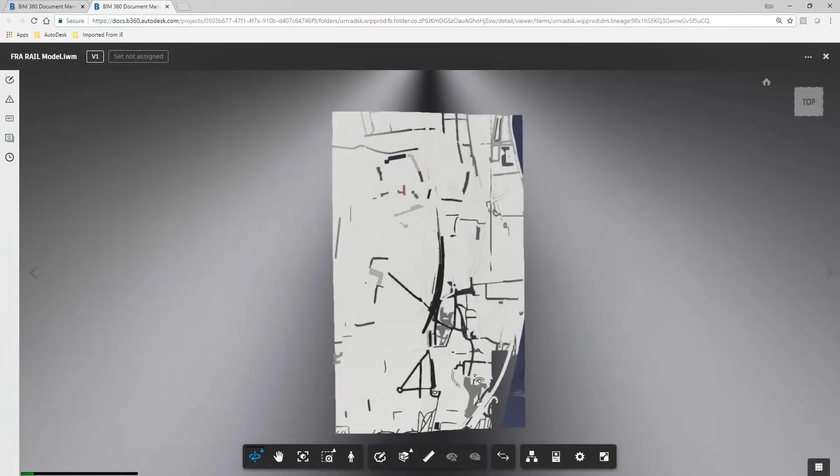Additionally, to being able to open and run the basic maintenance and operations of these different models, it's also possible to create duplicate models, and those will be stored locally. This is just a brief sampling of where this information can be stored, and you can create a local copy. This is going to be ideal for anybody who doesn't have internet access or knows they've got to work on a model they're not going to have access to. So that stores a local copy, and it can be brought back in as needed.

It's also possible that if a model has been removed from BIM 360, it can be managed separately just by disconnecting that model as well. Again, this is just to improve some of the functionality, whereas before this wasn't quite as clear. But on these opening menus here, right on the home screen, there's some pretty keen functionality that works with the maintenance of any of your models.

And then, of course, there's the ability to remove a cached model. If a model is still stored on BIM 360 and you need to remove that - if you've got some erroneous information, whatever it may be - it will remove that cache from your local drive, but it will still maintain that same model on BIM 360, so if you need to get back into it, you can do that as well. And of course, you have the ability to delete local copies completely from your machine as well.

So as we move on, there's some different functionality that's also been made available, and that's more with the shared views option. Typically, there would be one view available, but within your model itself, you could move around and actually define and create a shared view that is presented for BIM 360 or something like that. If you're sharing a model or collaborating in the work environment, you can actually select what that preview will be.

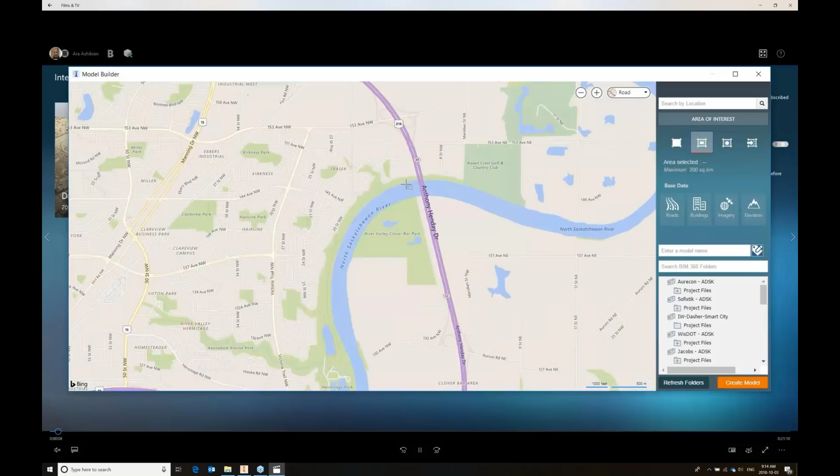Here I'm drawing an area where I want to create the model, and in a few minutes it creates a model. I superimposed a picture of the actual bridges that were built - twin bridges over the river. The bridge on the left has a suspended walkway for pedestrians; otherwise the bridges are relatively similar.

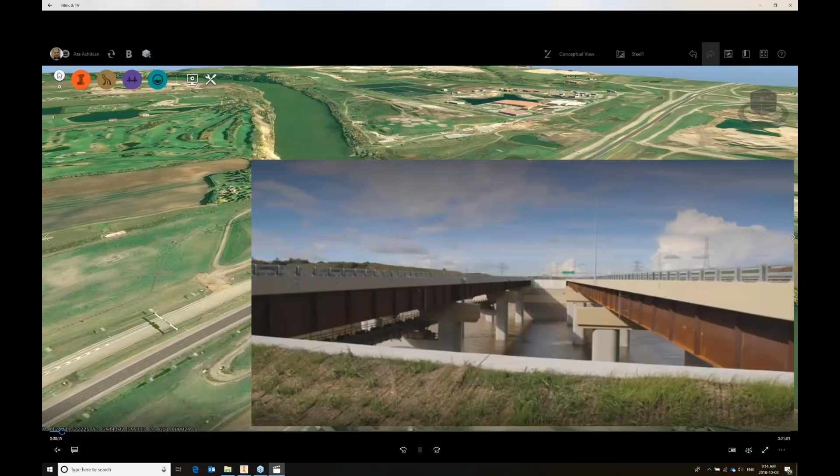In this quick workflow, let's look at how you might tackle this yourselves. I've already placed a suitable component road.

A component road is a parametric road where all the lanes, sidewalks and components are dynamic, and you can change their properties and adjust them as you see fit. Now I'm placing a bridge of roughly 300 meters in length.

Again, everything is dynamic and parametric. In early design, it doesn't really matter that you know the exact start station or exact length of the bridge - you can always come back and make any changes you want.

The other thing you might notice is when I place the bridge at the location along the river, it came up with a default bridge. So you don't have to create all the bridge components from scratch every time - you're not modeling separately every pile, foundation and pier. You start with a reasonable bridge and modify it. In fact, we'll see later you can start with your own bridges, not this default bridge.

So let's have a look at the next step.

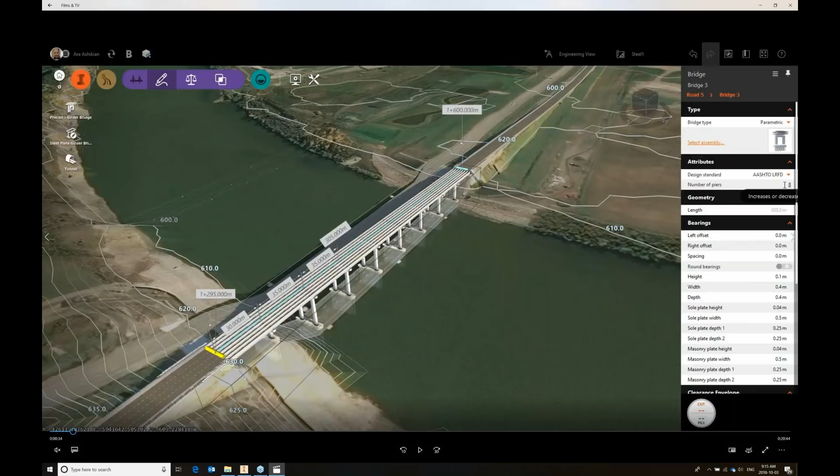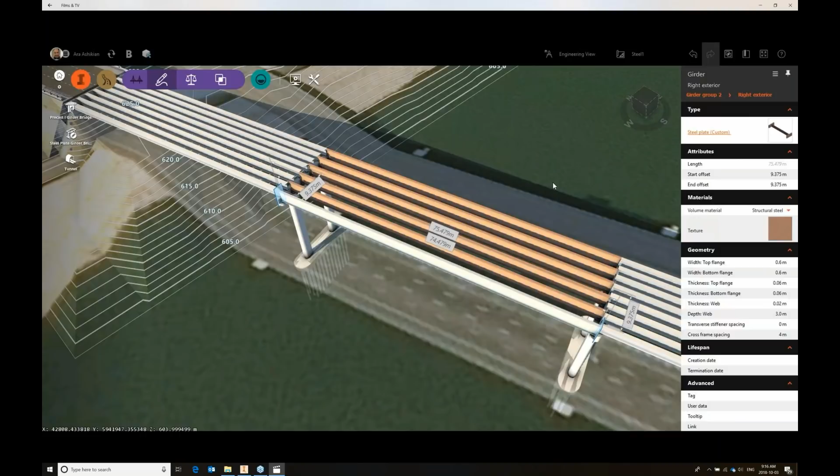So we place this initial bridge, and I just changed the number of piers to reflect the as-built bridge with 3 piers. Rather than having pre-stressed concrete girders, I'm going to swap those out to steel plate girder bridges, quickly change the number of girders to reflect the actual bridge, and assign these to the rest of the spans.

Now, when we say in-context modeling, that means you can see the constraints of the site. Here, I'm going to move the pier and rotate it to be exactly where I want it to be.

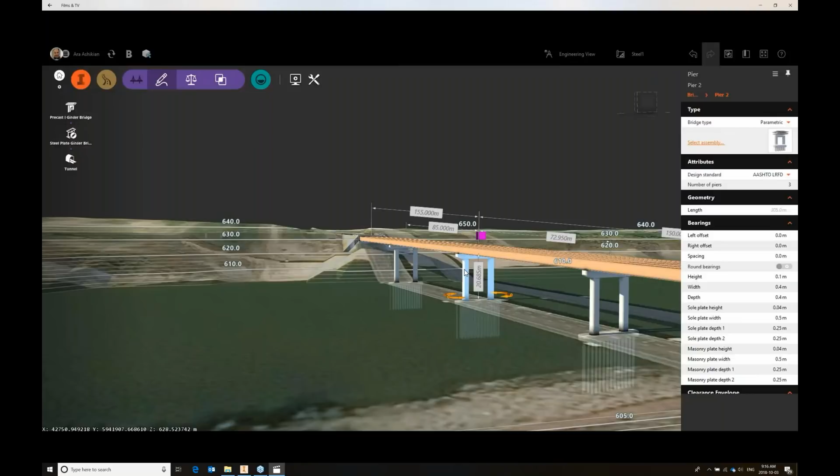The heart of the InfraWorks-led bridge workflow allows you to quickly configure, in almost real time, geometries of real bridges, and the system is open-ended. So in this case, rather than using the default pier we see here, this pier has a lot of parameters.

You can change the number of columns, decide whether the pier cap is tapered, whether its ends are rounded. It can accommodate varying depths of girders on either side, and so on. So you can build a lot of flexibility into these components.

The whole library in InfraWorks leverages the strong modeling capabilities of Autodesk Inventor. With Inventor, you can model really any type of pier, foundation, or girder.

Most users will be in InfraWorks, and when they click on a pier, they'll see in context the list of piers they can choose from. Pick the one you want and modify the parameters exposed on the screen to meet your requirements.

In some cases, you might want to extend the system, creating your own components—piers, abutments, foundations—which can be added very easily. In large companies, most users will be consumers, while a few people create comprehensive libraries of new components so you can differentiate and have exactly the bridge details you want.

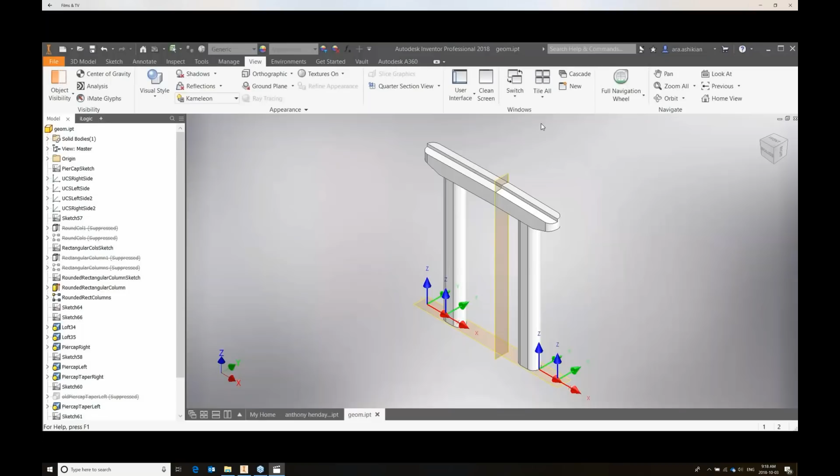Let's have a look at that. First, I'm going to change the parameter so it more closely resembles the desired layout, then work directly on the model. I'll select and create a sketch on the pier cap face and draw the geometry of the opening I want.

Notice how rather than typing in specific numerical values for the opening, I'm giving the dimensions of this sketch names. These names can then be exposed, so you have access to them from InfraWorks—that's what we mean by a parametric component. Instead of the pier cap opening width always being 5 meters, you can change it from 5 to 6, whatever you need. It's that straightforward.

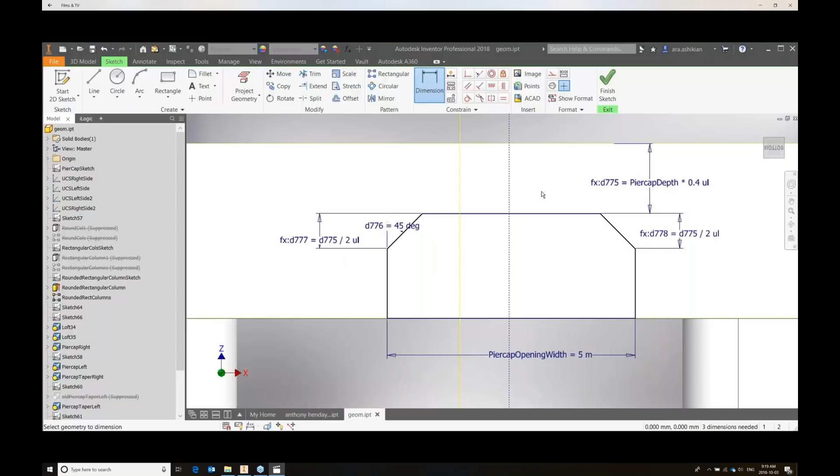So once you have the sketch, you do a 3-dimensional operation—in this case, cutting through the pier cap. I'm also sketching in quick detail that I'm going to sweep across the underside of the pier, so I have the architectural detail I'm looking for.

Once I'm satisfied with this, I save this pier and import it into InfraWorks. Once it's in InfraWorks, it's available in the same way as any content that Autodesk ships with the product itself.

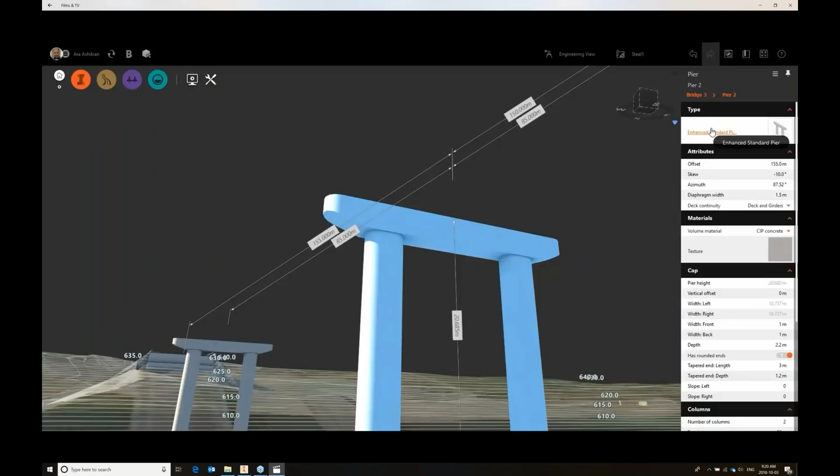We'll see later that it's not just bridge components—tunnel components and other components can be added to the system and be fully dynamic. Now I just went into this updated library and picked the one we just created. I can go and make changes to the dimensions.

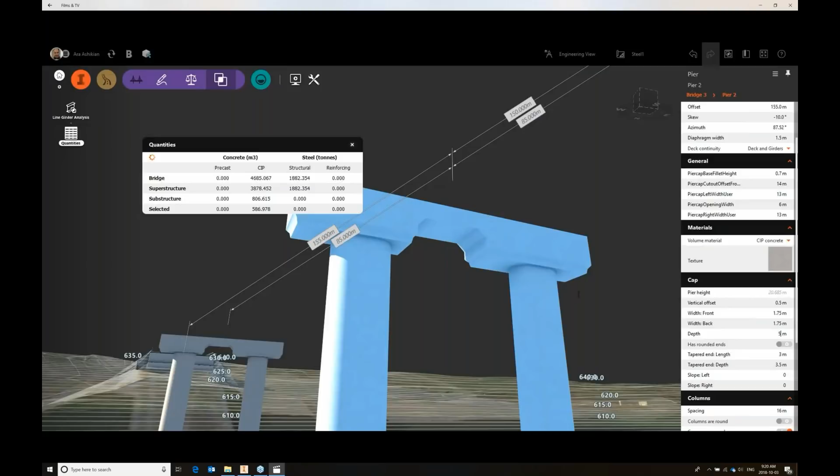I can view quantities. It really doesn't matter how complex the geometry is, it will give you at a glance a complete breakdown of the quantities. And if you make changes to the geometry, the quantities will update and so on.

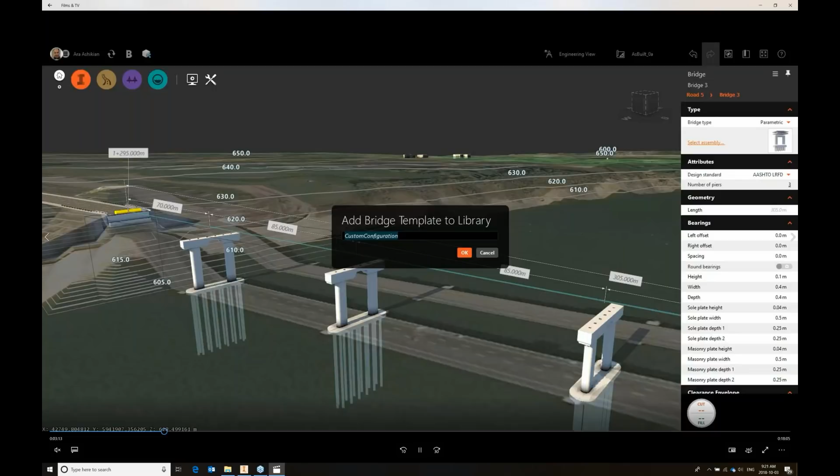Now, if you remember at the beginning, this is the as-built with twin bridges. The second bridge is almost identical to this one, except that it doesn't have the suspended walkway. In InfraWorks, you can create your own libraries of bridges, not just components, but once you configure this bridge, you can save it to its own library. You can imagine having a vast library of bridges that you can reuse. And when you reuse them, you just essentially change their parameters. It might have a different number of piers and girders, but otherwise be similar.

So here, I'm going into the library of bridges and pulling up the one that we just created, and making a few changes. In a few mouse clicks, I have the second bridge, which is as per the as-built drawings.

At some point, the workflow in InfraWorks allows designers and bridge engineers to work with their knowledge of bridges. It's very straightforward, you can be up and running very quickly. The variables you're playing with are basically dimensions and parameters of bridges or tunnels, how many piers, what's the spacing, and so on.

At some point we want the full BIM model so we can do construction drawings, place rebar details and so on. Here we have complete integration with Autodesk Revit. Revit, of course, has been used for years on vertical construction, and in the civil infrastructure space we really want to leverage its very strong capabilities. Creating even this bridge in Revit in the past would not be simple, because Revit doesn't necessarily understand civil geometry, alignments, horizontal and vertical profile and super elevation, whereas InfraWorks understands this in the context of the site.

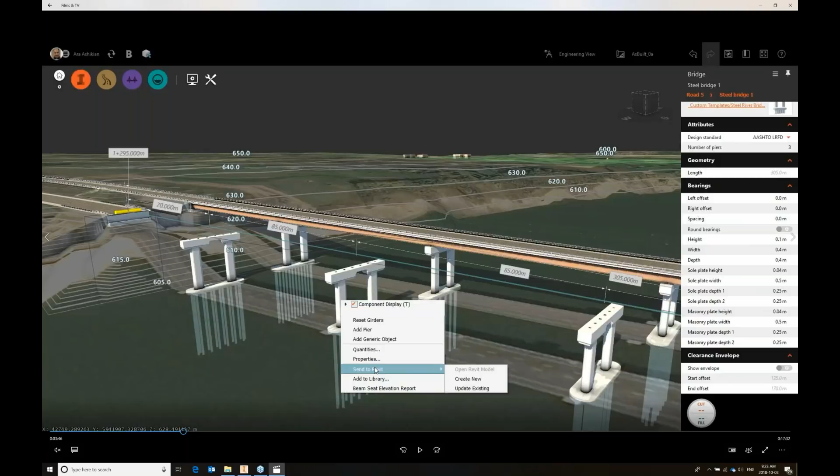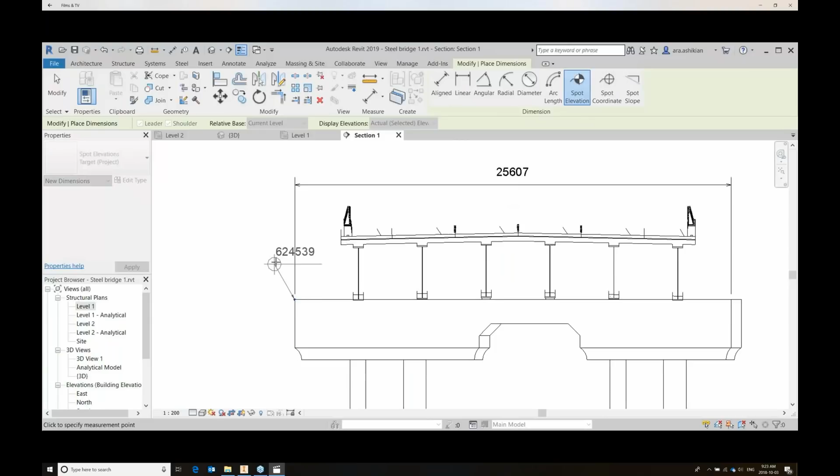Now we created a workflow where you can dynamically create the Revit model. You basically select a bridge and say send to Revit, and create the new model. In a few minutes you get a complete Revit model in front of you. With this Revit model you can do plans and elevations, you can place rebar. In this case, let's go in and show the elevation view of a pier and add some annotations to show some of the key elevations and dimensions on this cross section.

What we added earlier this year was the ability to at any time go back into InfraWorks and make changes. It might be that you started early and you have a large team in Revit doing all the drawings and documentation of the bridge. You want this team to start early because that takes more time than creating the parametric model in InfraWorks.

However, in a real world project, you will make changes as the project evolves. You might have to move a pier because there's an underground utility that you discovered, or raise the vertical profile for some reason. Many little changes, or it could be big changes - you might decide to go from 4 spans to 3, or from 6 girder lines to 5, to see if you can come up with a more efficient system.

So we created a workflow where you can come back and make changes to the InfraWorks model as required at any time. Here I'm going to raise the vertical profile of the road just a bit, and I'm also going to change some dimensions of the pier, making the pier cap 4 meters deep instead of 3,500 millimeters deep.

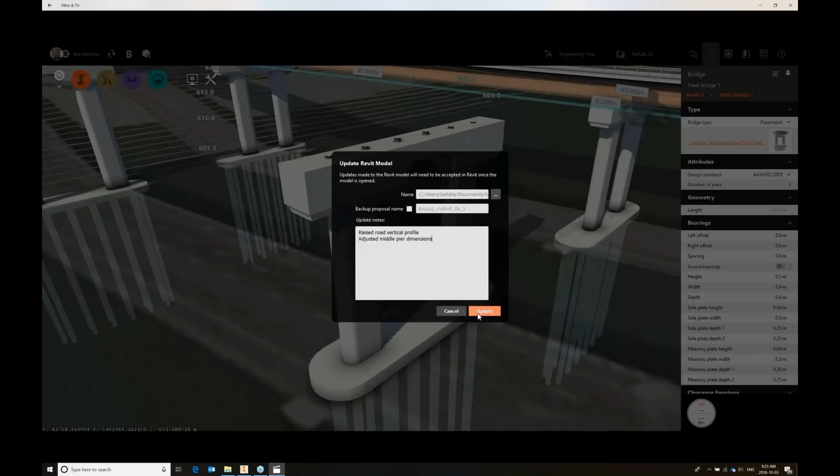Then rather than creating a new Revit model, I'm going to say update the existing Revit model. We want everyone on the team to understand who made the changes, when they made them, and why. So when you say update, you have a chance to specify comments so the rest of the team understands these changes. Now, whoever is working in Revit at that time, or the next time they load the project, would see that there are changes pending from InfraWorks.

Should they accept these changes, the Revit model dynamically updates. This is a huge difference from conventional workflows, where in the past, if we had created this project using 2D CAD in AutoCAD, you would have to go and make changes to a number of drawings because the vertical profile of the road changed - it would affect every elevation view, every section view, and so on.

Here, once we accept these changes - so we know who made the changes and why - we apply them, and the Revit model behind the scenes updates, and wherever possible, existing annotations and rebar and so on update to the new geometry.

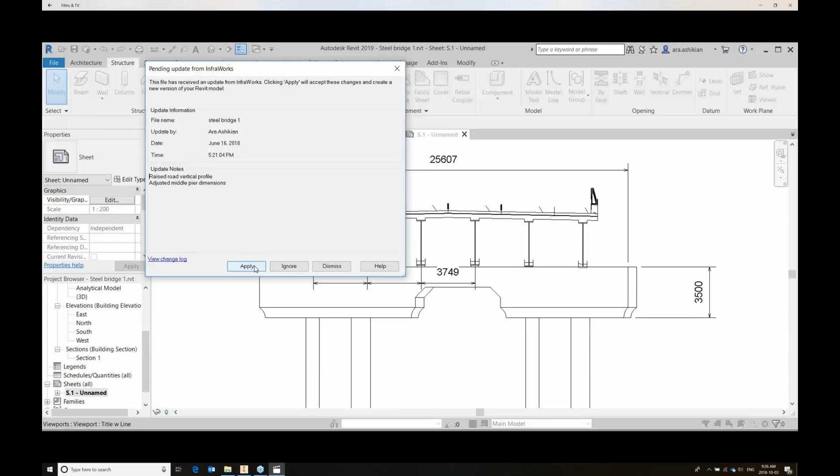In this background, we can see the 3,500 millimeter pier cap depth, but we changed that and raised the road a bit. When I apply this, you'll see the model is going to update, and the dimensions and so on will update.

So huge implications on productivity in this iterative real-world scenario of going back and forth from concept to detailed design stage. Now it's not just a case of pretty pictures and quantities. As a bridge engineer, you have to carry out some analysis to validate your design. It might be simple analysis at the beginning to validate the superstructure layout—is it feasible to have 85-meter spans here with a 3-meter-ish girder depth?

Or as you get into further detailed design, we'll be introducing much more refined analysis, opening it up to work with analysis partners. But at the moment, we recently introduced the ability to carry out line girder analysis, which is a continuous beam model of the bridge. It uses code-based distribution factors to establish moments and shears on all the girders and carries out all the code checks to validate your initial design.

So let's have a look at that. You can look at all the girders at the same time or a specific girder. In this case, we're looking at an interior span exterior girder, and we start the analysis, and in a few minutes it's going to highlight. Here I used the AASHTO LRFD code, but you could be using a Euro code or an Australian code, for instance. This leverages Autodesk Structural Bridge Design on the cloud.

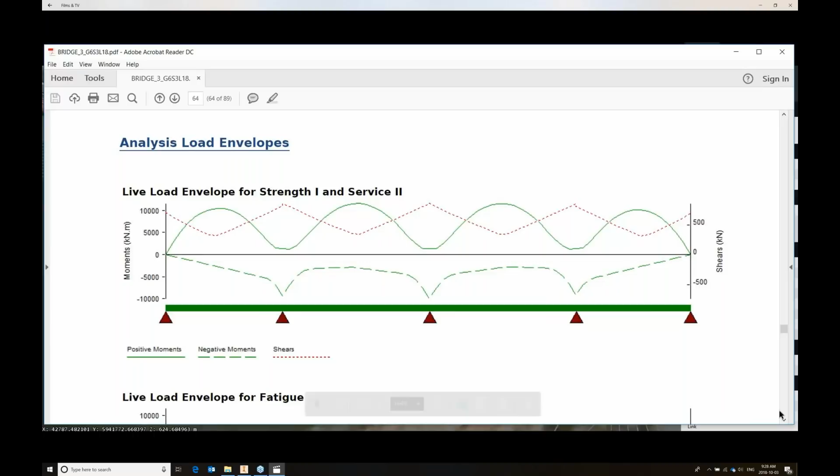It carries out all the computations and shows you at a glance here on the left. You can see the shear capacity clause is failing, and the bending clauses are near unity. At any time, you could hover over any of the girders you studied and obtain much more detail. So here we can get a full breakdown of all the computation, and Structural Bridge Design is very thorough with this—moments and shear diagrams and envelopes and code clauses with clear descriptions of all the code references for these checks.

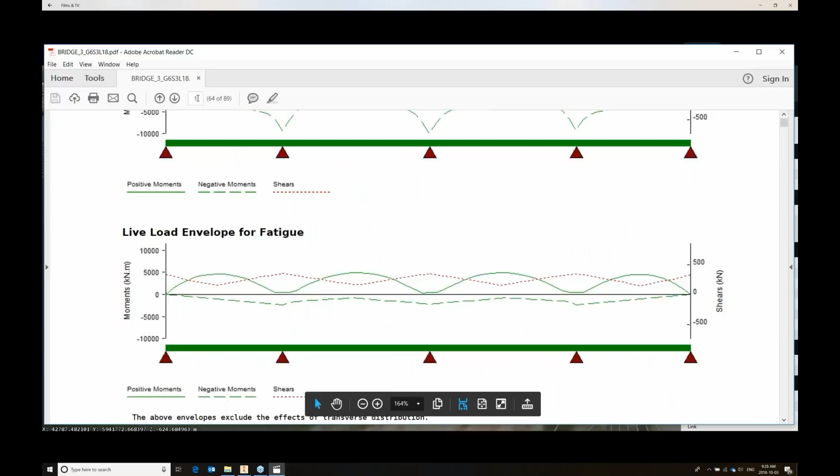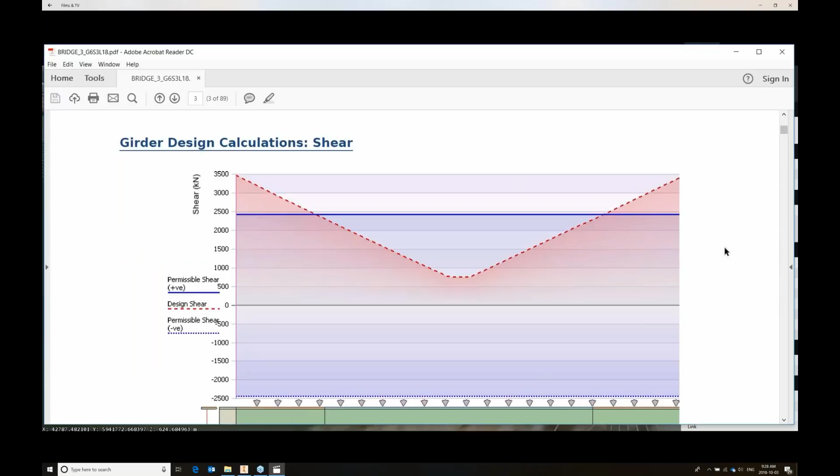This is part of the workflow. As you're looking at the concepts, you might be moving piers around and playing with different girder configurations, and at a glance have this type of information available to help guide your decision making. So you can see here some of the typical design checks that you have to carry out—again, very thorough.

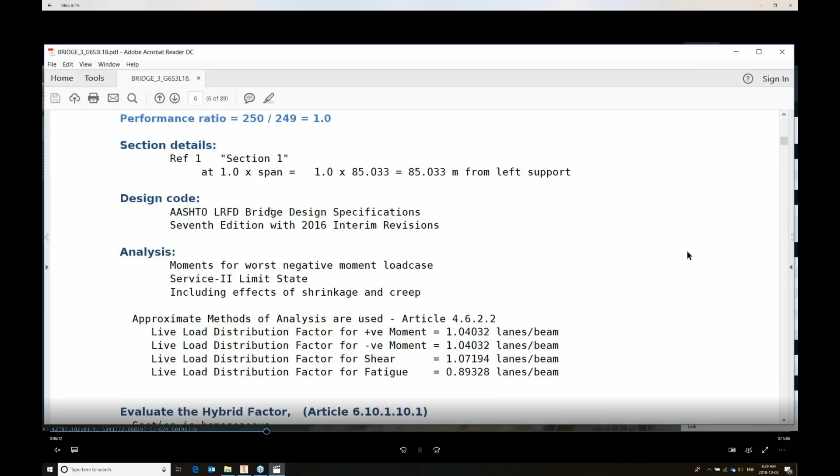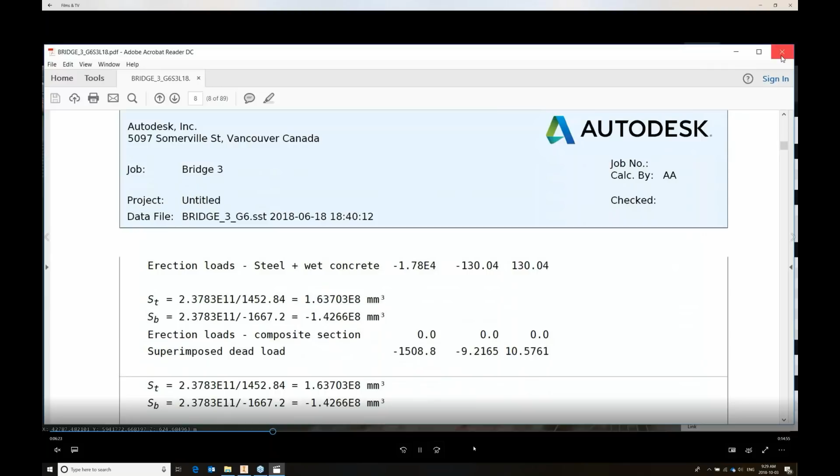We have one or two questions, and maybe some of our panelists can help out. The question is regarding whether the girder analysis requires cloud credits. So this is what we call the line girder analysis, and we're not requiring cloud credits for this. Call it basic early design stage analysis—so a continuous beam model.

We are developing, and it's very exciting, capabilities for cases when you get into more detailed design. What if you had skewed piers or a curved bridge alignment, where the applicability of a continuous beam model for detailed design isn't sufficient? You'll be able to extract in real time a full finite element model, in this case of a steel plate girder or composite box girder bridge. If you've worked on those, it can take days, if not a lot longer, to create, calibrate and use. You'll be creating those in real time as you're modeling the bridge. Our intent is to have cloud credits for these advanced analysis capabilities, but leave the line girder—which is early design—just part of the workflow with no cloud credit requirements.

I'm just carrying on here. I made a change to the transverse stiffener spacing, and you can see now all of a sudden it updates. You're not limited to just looking at that—you can experiment, playing with the modeling capabilities we have for girders. You can use girder slices and change any dimension along the girder and see what happens if it's variable depth.

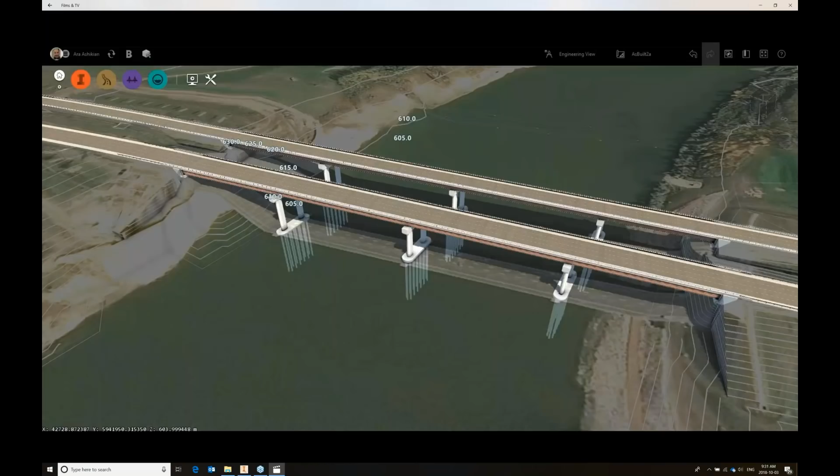So that's enough from what we had early this year. Let's talk about what we just added—this is the concept of generic objects. Let's introduce that with, initially we created, a release or two ago, parametric road decorations. Let's have a quick look at that, and then we'll explain how this has gone beyond road decorations into more detailed generic objects. So here, I placed the sign structure on this road.

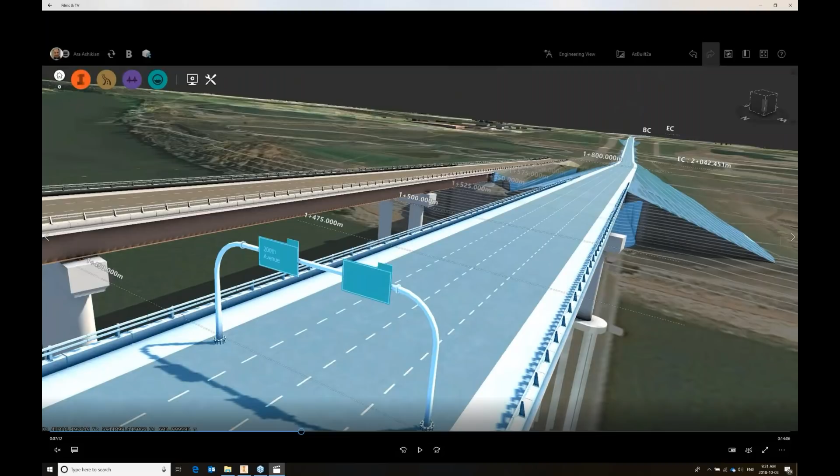In the past, you might have a collection of SketchUp models, basically static objects that you'd place along the road. But what users need is the ability to place a typical sign structure and have every one of its dimensions completely dynamic. So I don't want 10 of these models, I want one where I can specify the width, the height, even the content of the sign, the text, the diameter of the columns, or the number of anchor bolts. I want everything to be dynamic so I can reuse this component across projects.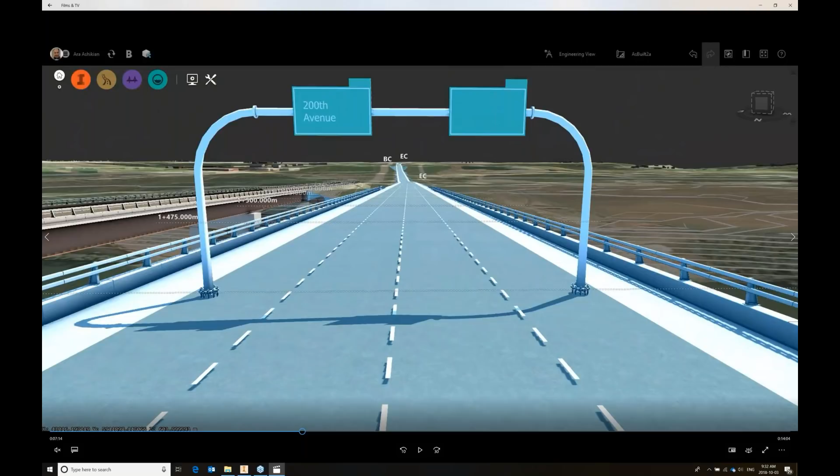This is what we added with parametric decoration. So here I'm selecting it and changing some of its dimensions on the stack panel in the very same way you do with the bridge components. Again, this is leveraging content which is Inventor-based behind the scenes.

Now, what if we take this idea further? We mentioned this bridge had a suspended walkway, but bridges and tunnels will have all sorts of unique features as required. Rather than Autodesk trying to come up with a different category for every conceivable component of a bridge - it might be a cofferdam for that pier, or seismic restrainers, and so on - what if we provided the ability for you to place dynamic objects at any location along the bridge or tunnel? This is what we call generic objects - essentially three-dimensional parametric Inventor components that you choose to place along the alignment of the bridge.

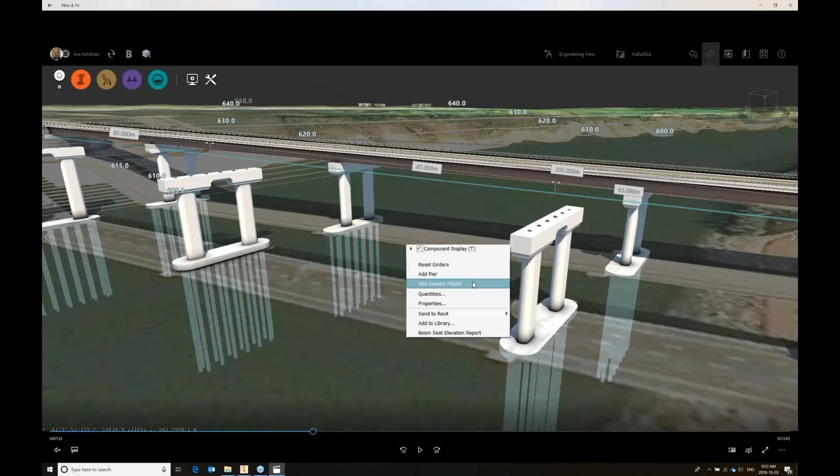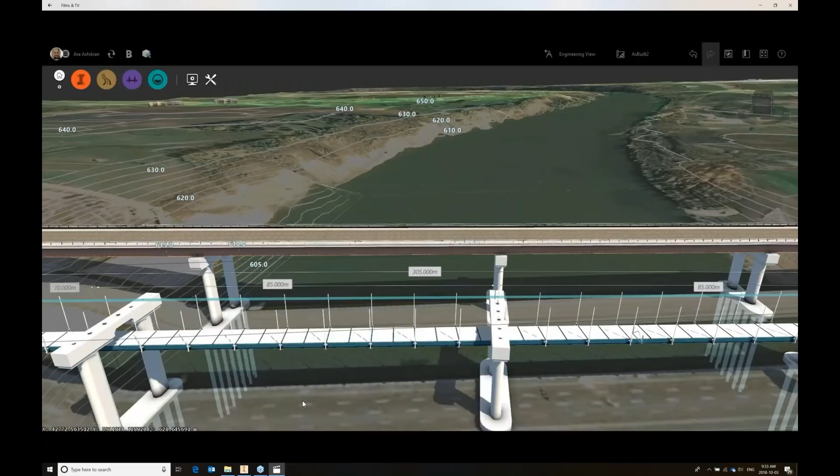So here, we're going to right-click on the bridge, select Add Generic Object, and place this suspended walkway component at a certain location, with multiple exposed parameters such as the geometry of the precast panels, the edge girders, and the hangers. Relatively quickly, you can model what in the past we wouldn't have been able to, because it's a bit too unique, but now it's kind of open-ended.

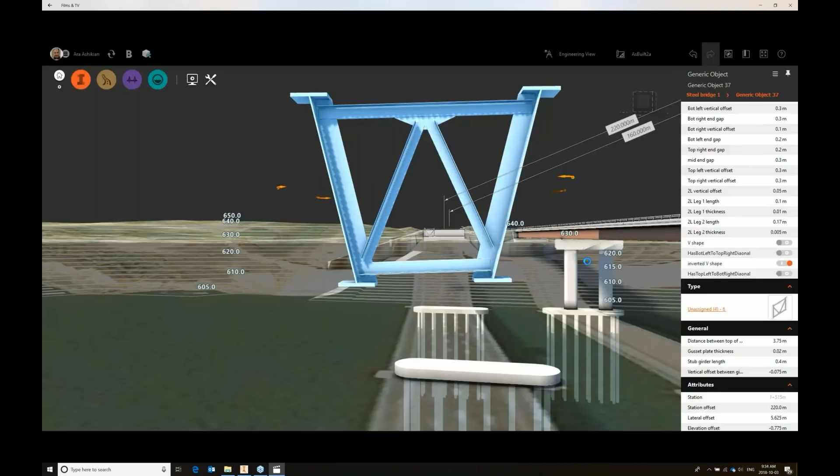This generic object is also going to lead the way into much more detail for steel superstructures. This is an example of a cross frame between girders. We want this to be intelligent, so as a designer you can specify which configuration you want - X, inverted V, and so on - and you can see that geometry makes sense. Even if you had a box girder, everything would adjust for different super elevation or different configurations. We want these objects to be very well behaved.

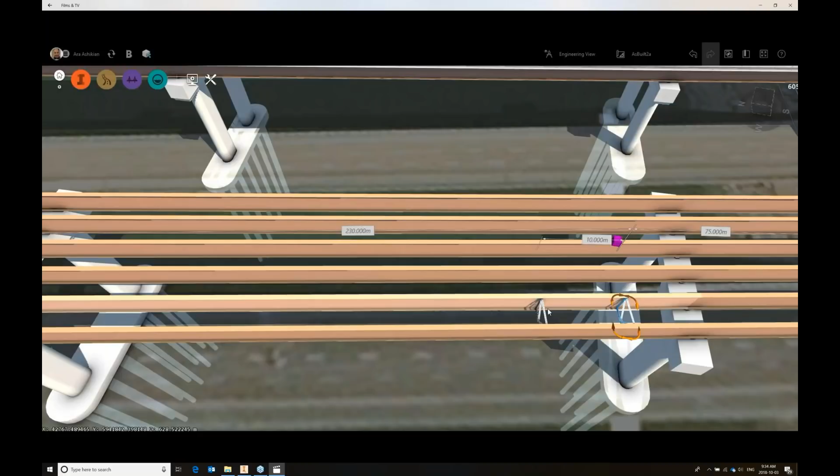And this is what you can see here - you can place these generic objects. We have plans to make it even smarter so they automatically recognize changes to the girders and spacing. So you basically just place them where you want, and the system will automatically pass all the dimensional information required.

So everything lines up as needed. Now, we also added that when you create this model in Revit, all this information carries over - the generic objects, sign structures, even the text on the sign, everything is there. So create your models, have all the detail you want, make it dynamic so you can reuse it over and over again.

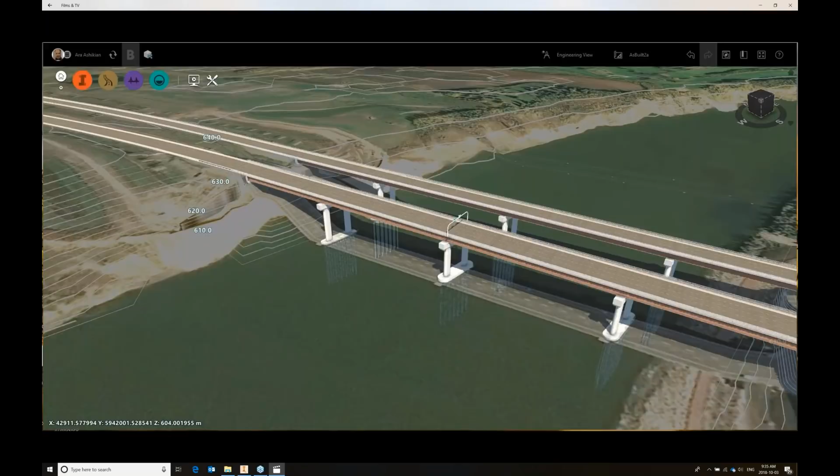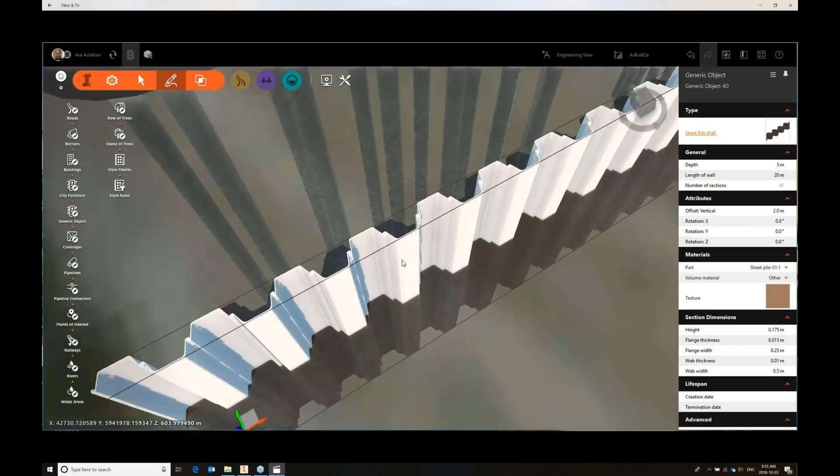And we didn't want to limit all of this just to bridges and tunnels. InfraWorks is a broader system than that, so we added the capability to add generic objects directly to the terrain. What if I wanted to add sheet piling here near the bridge? Now I can create really any Inventor model I want and expose any parameters I want - in this case, classical sheet pile - and interact with it directly. I can move it around with the on-screen gizmo, rotate it, place it, change its parameters for length and height, and have it available in my model.

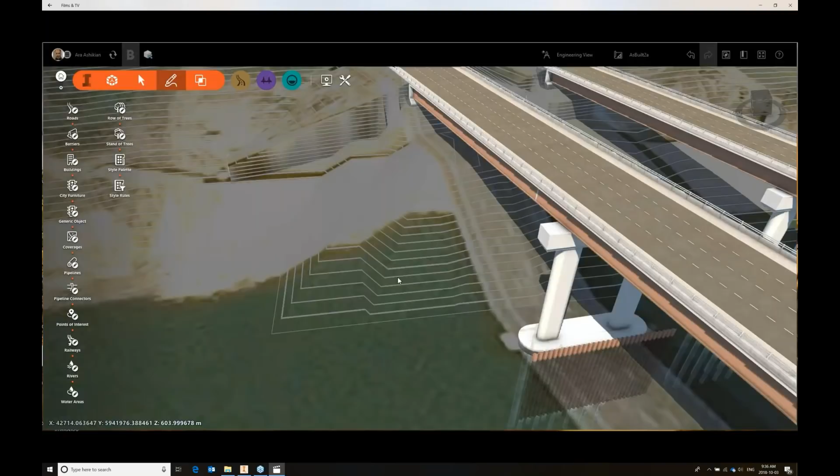You can imagine all sorts of other things - it could be construction equipment, it could be a small dam in the model, and you want it to be dynamic and parametric, not a static mesh you just place and use once. Here I'm going to place another generic object, a segmental retaining wall. Again, this is far more detailed than, say, you would do in the Civil 3D subassembly composer - this is three-dimensional geometry, you might have drainage details, all sorts of other things configured in the model.

Here I'm changing the plan radius of it, and so on. So start imagining that every component of your InfraWorks project beyond the bridges can also be dynamic.

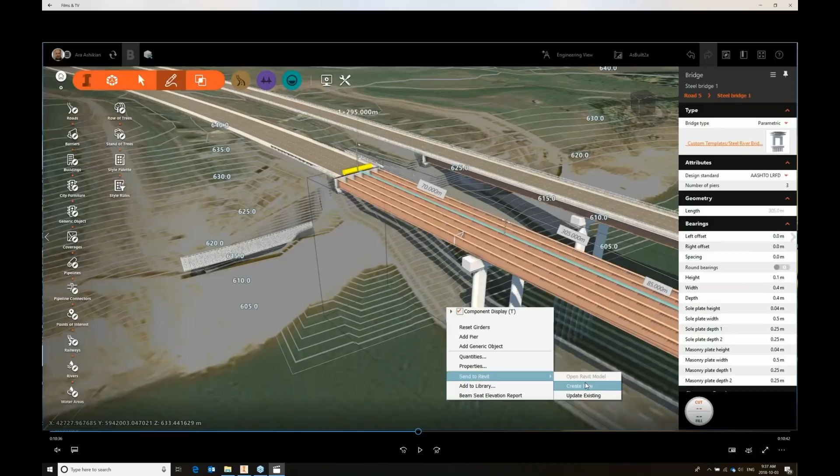In the past, we saw earlier in the video how you can create the Revit model of this bridge with the context menu. We extended that. In this case, we don't want a separate Revit model for each bridge. For this location, or every interchange, you might have a combined Revit model. This InfraWorks model could be huge, maybe the whole city of Edmonton, whereas you want the Revit models to be maybe each interchange or river crossing. You want to limit it, but not to one bridge.

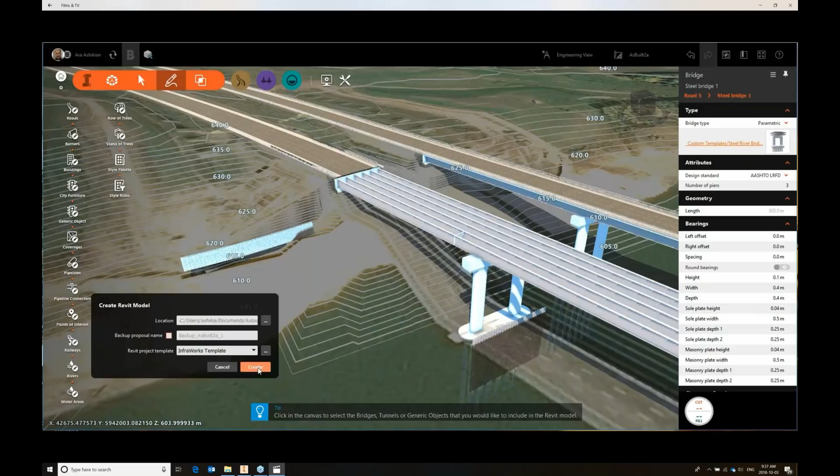So we extended the send to Revit. When you say create new, you can see we highlight in blue all the objects which are suitable for Revit. In this case, those are based on bridges, tunnels, or generic objects which have properties and parameters. Here I'm going to select the second bridge, select the sheet pile and the retaining wall over there, and then have one combined Revit model created. It's the same workflow, just a lot more flexible.

You can see now this combined model with all these objects, sheet piles, and so on and so forth, and the segmental retaining wall that we're going to zoom into.

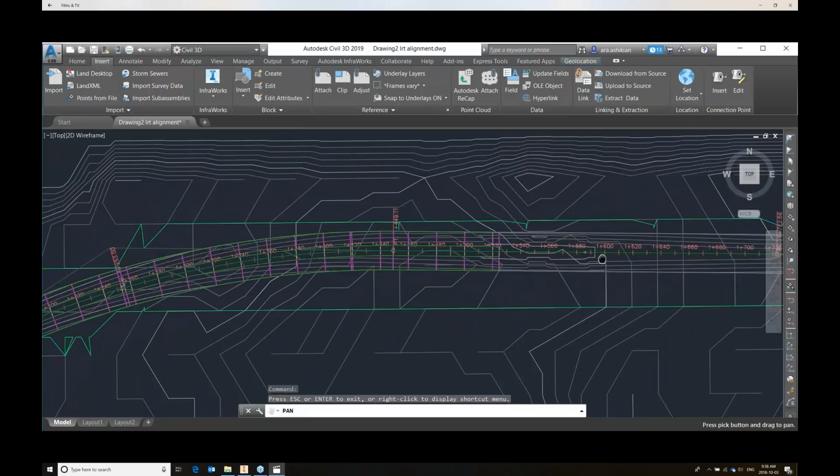This part of the video steps into a scenario where you might start in Civil 3D with an alignment. This is a fictitious alignment for, let's say, railway, light rail. I want to import or leverage this alignment in the InfraWorks model and use that to come up with my light rail bridge structure, for instance.

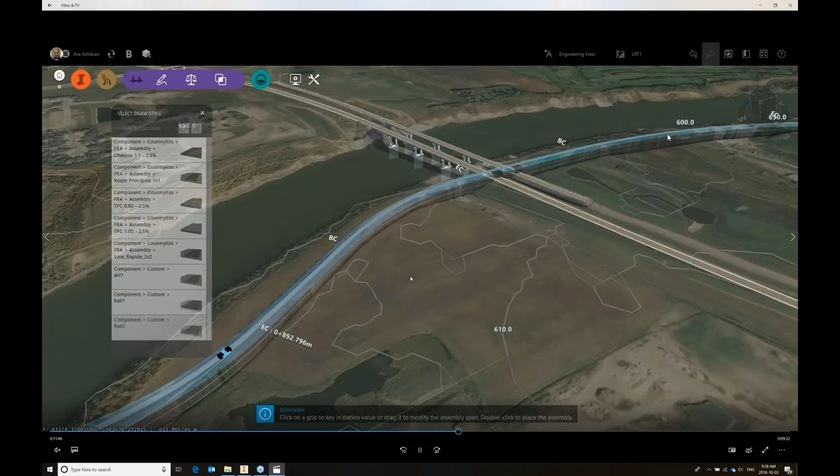Here I can import and link this alignment, and now I'm going to use the component road geometry and place the geometry along this. In this case, it's an assembly reflective of light rail, and then I'm going to place a length of bridge, just 1 kilometer long—it could be longer, but just for illustration.

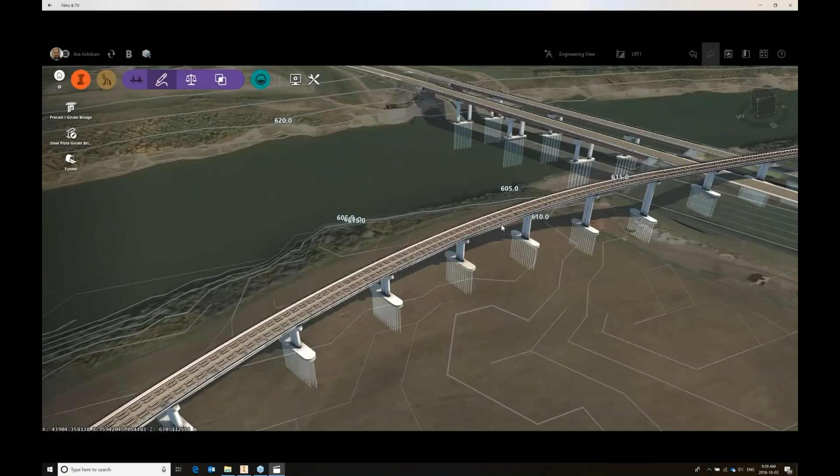If I zoom in, I'm going to change the components of the bridge to be more reflective of a light rail. In fact, you would probably create this and add it to your own bridge library, and your next light rail project would be a collection of light rail suitable structures that you would just open up and modify as needed. Here I'm putting a guideway, box girder, and maybe a flared column and a suitable foundation.

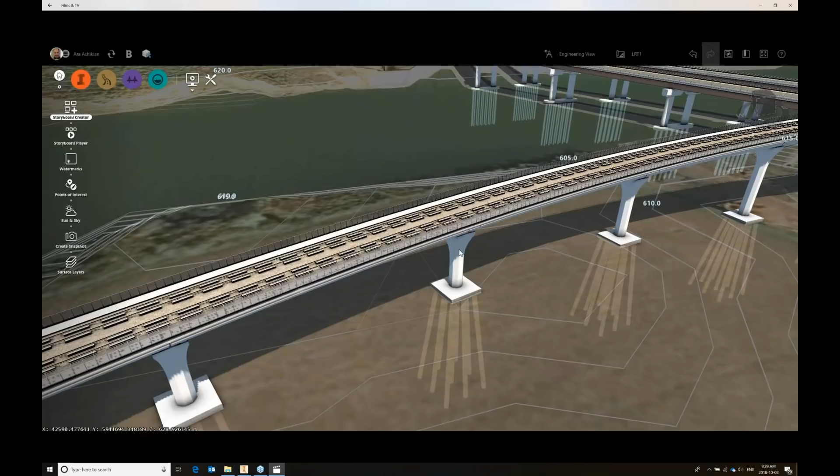You can see here, really in a few minutes, you have something that has quantities, it's parametric, it's dynamic, and you can again open it up in Revit. The Revit model is a full BIM model, allowing you to add all the rebar details, construction drawings, and IFC workflows. One can just imagine how long this would take to do directly in Revit, but as part of this overall workflow, it's very straightforward.

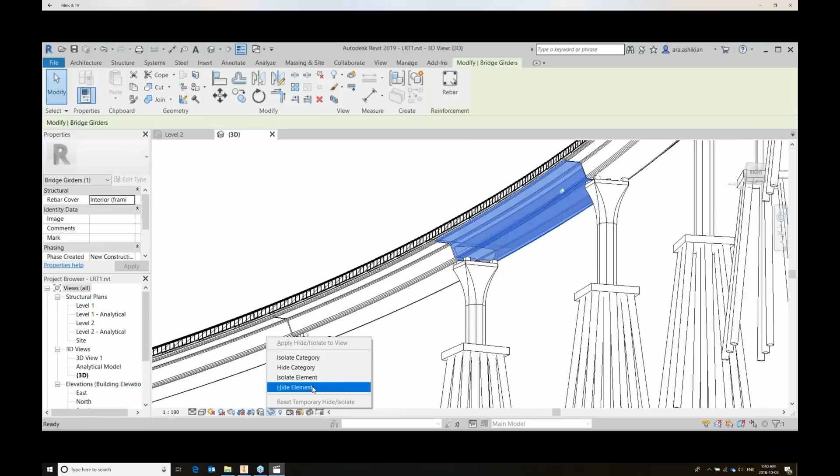Here we're going to select curved in plan box girder, cast in place box girder. We've worked with the Revit teams extensively over the last while to extend Revit so it better handles the requirements of complex geometry typical of civil structures. Rebar that follows curved geometry is what we call freeform rebar. We introduced that the last couple of releases, and we keep refining those with transverse rebar freeform capabilities.

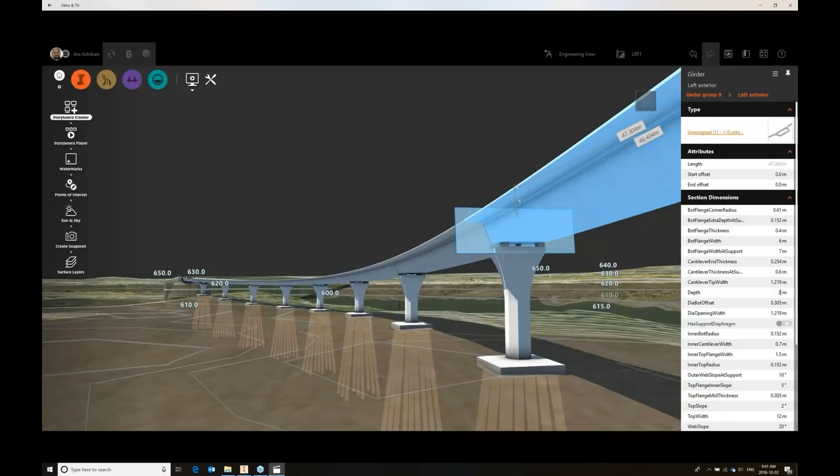So you can see that in the real world, you might go back to InfraWorks, or in the near future, go back to Civil 3D and make changes, having all those changes propagate down to InfraWorks in the same way that InfraWorks changes are handled in Revit. Here I change the alignment and maybe the depth of the box girder, and I want the Revit model to update. This is a real world scenario—changes happen all the time in real projects, and you have to accommodate those in a way that everyone can keep track of the changes.

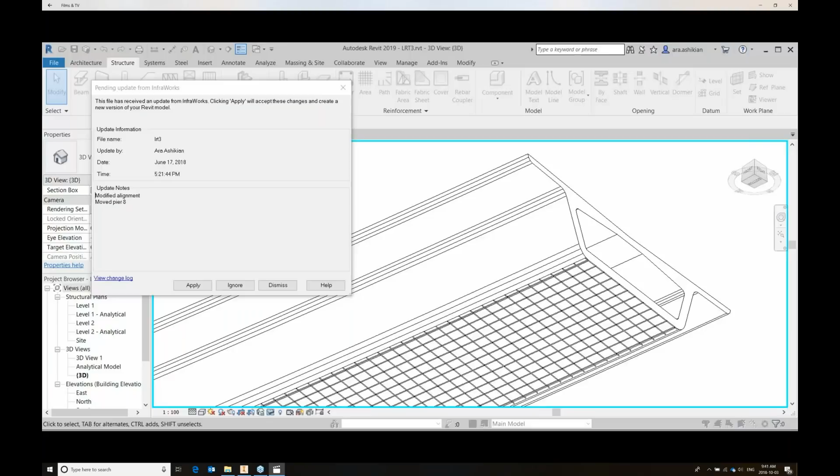So here we go, we've updated everything and it reflects the changes. Now, parametric generic objects really open up the door. The next part of the presentation shows how you can get into much more complex geometry than what we saw earlier in that light rail structure, which was essentially cast-in-place type geometry.

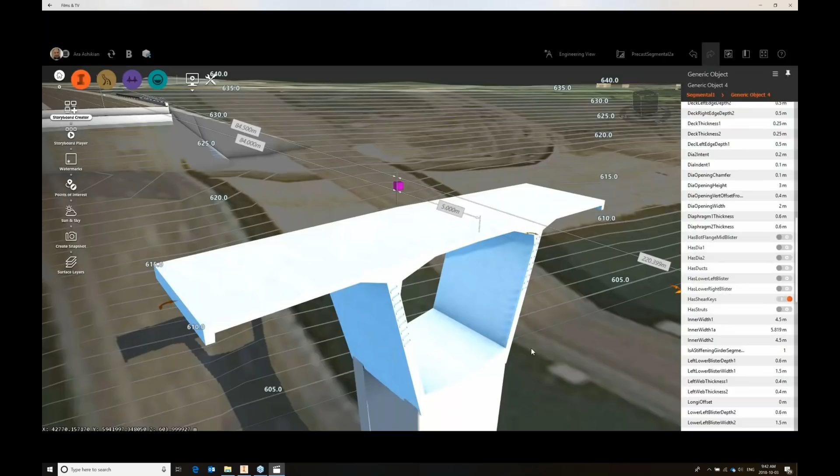But what if you have precast segmental box girders? This is really much more complex geometry. With generic objects, you can place a component of a precast segmental box girder that exposes the parameters that you, as a designer, want to control. Does it have shear keys? Does it have struts with longer cantilevers? Does it have diaphragms over the pier? All of these are dynamic parameters that you can explore.

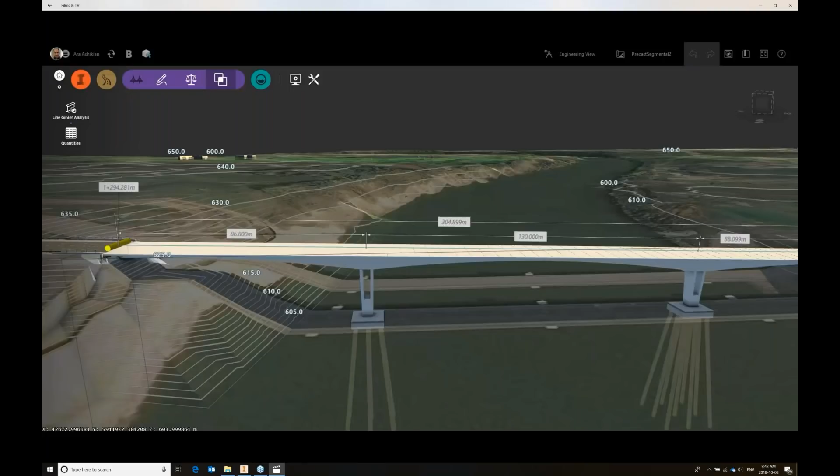You can, of course, create your own precast segmental box girders, and then really quickly create the geometry and model of a much more complex bridge. It doesn't matter if the bridge is simple or complex, the workflow for the full BIM model is the same.

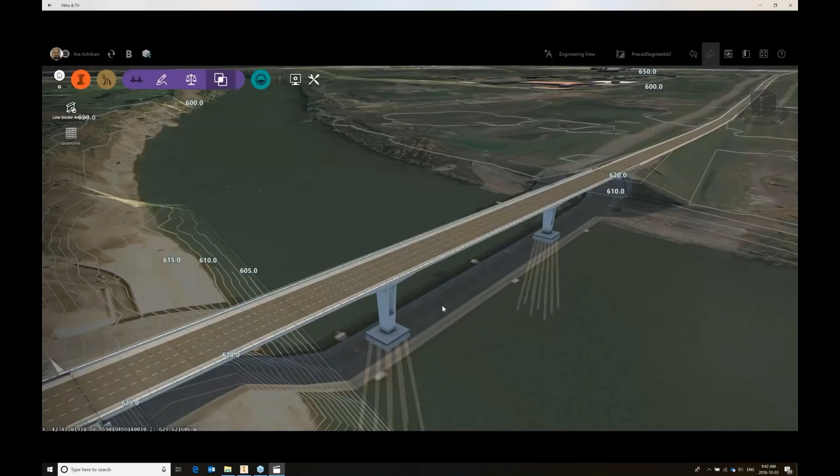You just open up the same model in Revit, and you can see all the components of this more complex bridge are already in Revit. If you zoom in and isolate the pier and the pier table, you can see the level of detail that we're talking about.

What if you have completely different types of bridges? We couldn't do this in the past—an arch bridge. So here, let's configure a few approach spans, and then we want a main span which is a steel arch. We created a pretty rich generic object in Inventor for the steel arch.

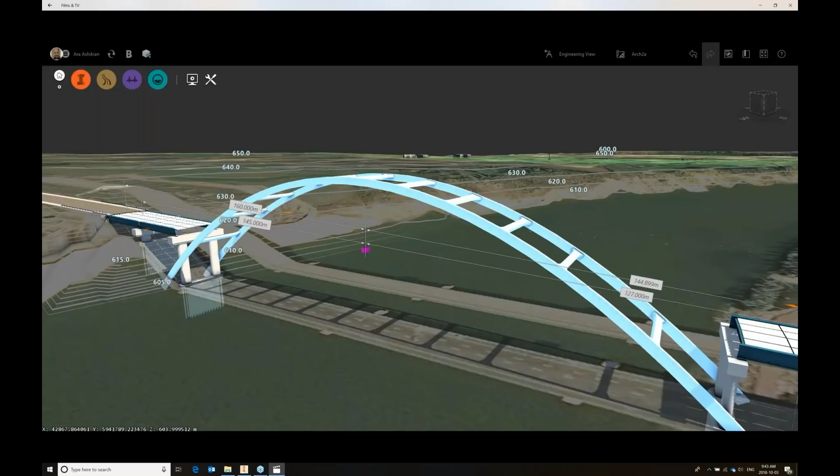This steel arch exposes parameters such as the rise, the width, and the parabolic variation of the geometry, and so on. Once you're satisfied, you can start placing a superstructure, in this case a composite one, or some other configuration, whatever you choose to place.

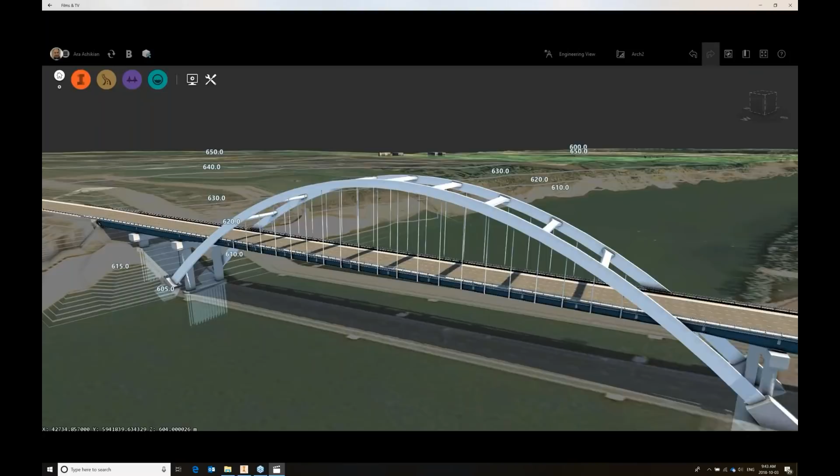And again, in almost real time, you can start configuring a wide range of concepts that can go to detailed design, with quantities. Our next step on these more complex bridges is to work with our analysis partners so we can leverage all this information in the model to create much richer analysis models for global analysis and so on.

What if you had a different type of bridge, a cable stay bridge? Here I have a collection of piers and towers. I'm just going to use one of them from the very nice Golden Ears Bridge here in Vancouver, but I'm going to change its dimensions to be more suitable to this crossing.

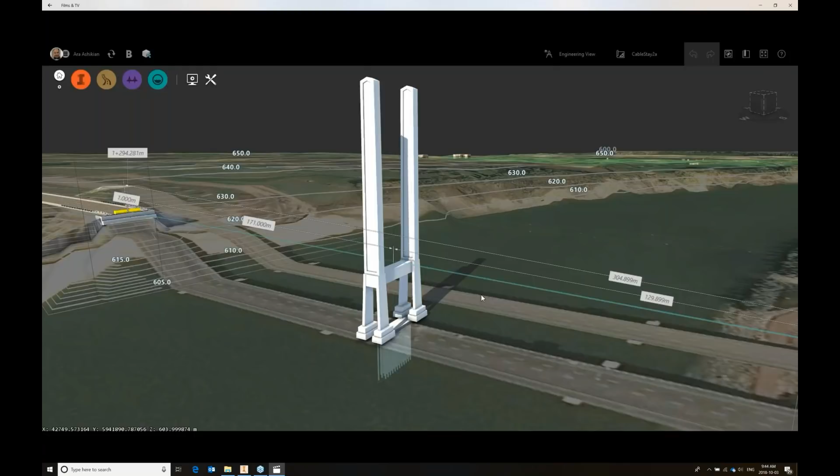I'm going to use generic objects to have an even more detailed component of a bridge superstructure. In this case, you can see that the Inventor model has not only the girders, but also the anchorage details, and they're all dynamic and parametric—a kind of mechanical level of modeling that you can do in Inventor. Here I can control the geometry and the stays the way I want them.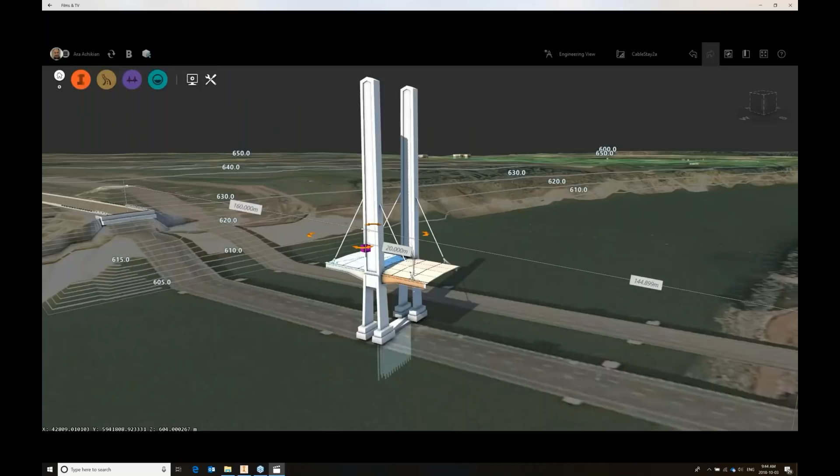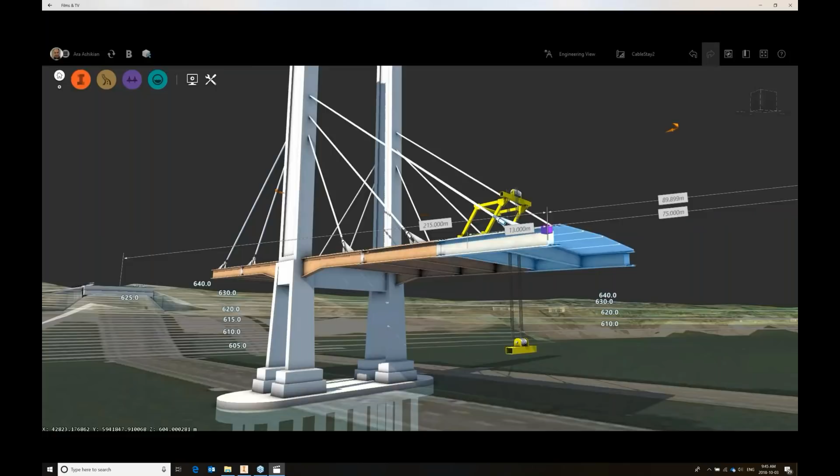The generic objects can also open up a whole wealth of options to go into 4D construction. We'll go further in the future on this, but this is just hinting at where we're going. The construction equipment, like every component of the bridge, is parametric and intelligent. Now imagine if all of that was linked together—how you could investigate how you're going to build this, how you're going to stage it, and so on. A lot of interesting things coming there, but this hints at much more complex bridges that you guys can do.

Again, with the release of InfraWorks from last week, all of this can be done. Creating the Revit model in this case is no different. Let's put a drawing sheet together that shows maybe an elevation view, a section view, and an isometric, and you might put some annotations in there.

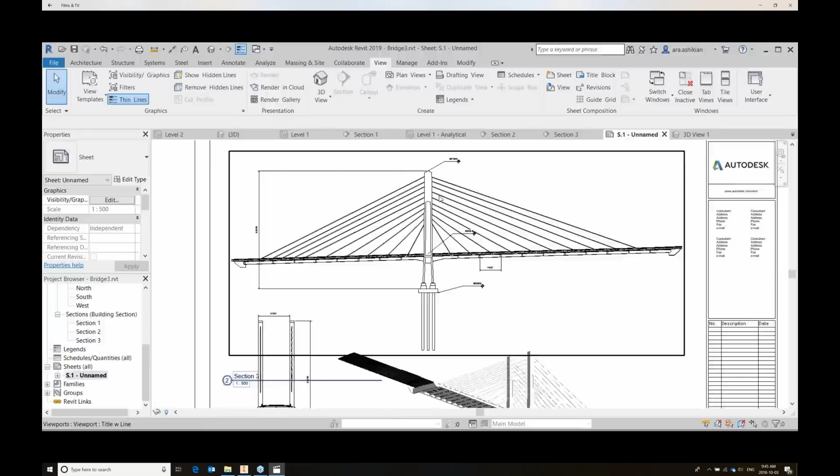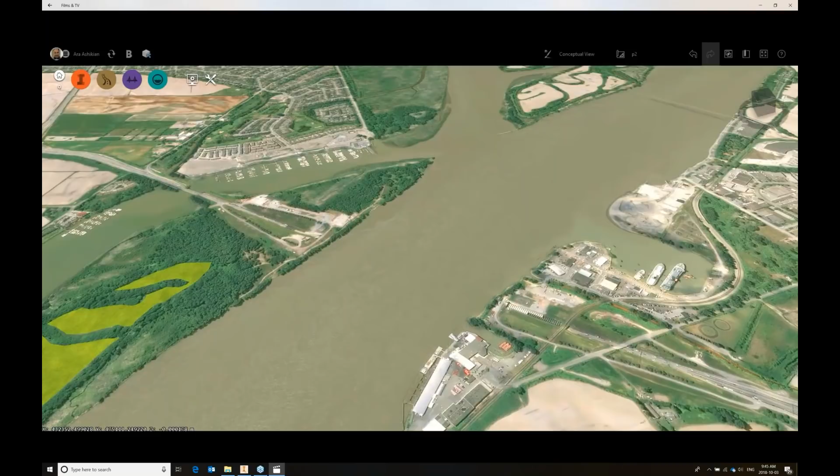We've been leveraging the bridge parametrics to go well beyond what InfraWorks used to do for tunnels, whereas basically visualization tunnels become parametric tunnels with quantities and workflows to Revit and so on. So here, this is a Massey Tunnel location in Vancouver.

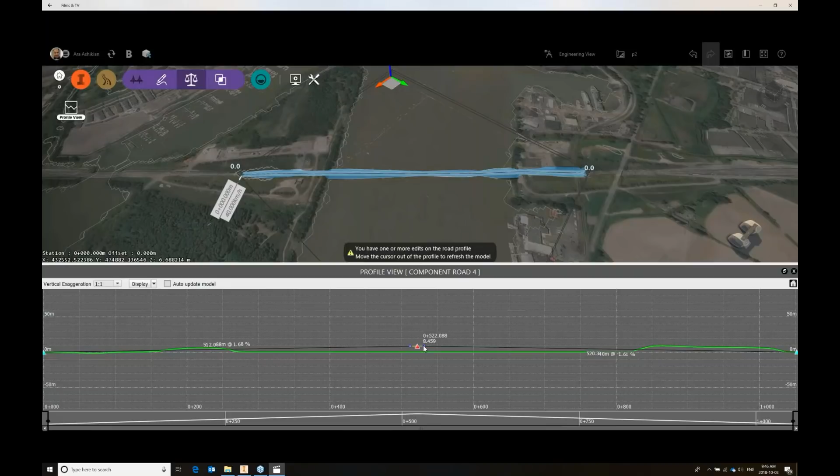I'm placing an alignment—you might import the alignment from Civil 3D, for instance, or just place it here. I'm just placing it nominally, and I can change it later if I need to. I'm playing with the vertical profile, making it, of course, below the water level.

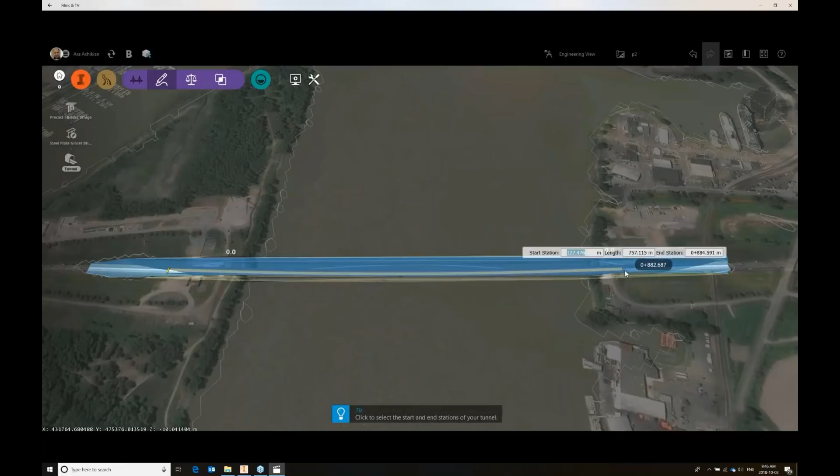Once it's configured, instead of placing a bridge, now you have this new tunnel icon on the toolbar, and you can place a tunnel. The tunnels are based on parametrics that you can bring in from Inventor, very similar to a complex box girder bridge.

In this case, I just placed a tunnel, and I'm going to go in and grab the ends of the tunnel and look at the context of the site. I can see the aerial imagery and the portal area. I'm going to push and pull it back the way I want it.

And this is a default cross section. I created a parametric tunnel section based on the as-built drawings of this tunnel, which had multiple openings and so on.

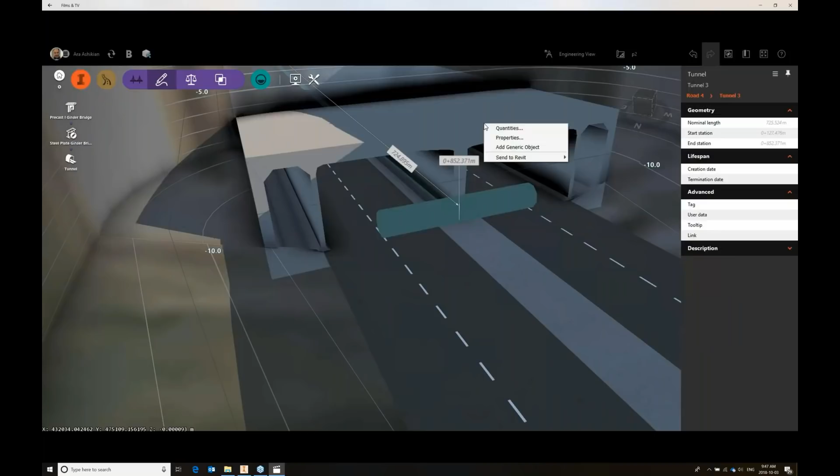And all of those have dimensions that you can vary yourselves, create your own. The ends of tunnels tend to be much more complex than two-dimensional extrusions, so you can place portals, which are three-dimensional entities. In this case, you have struts and walls that you can configure at three-dimensional complexity.

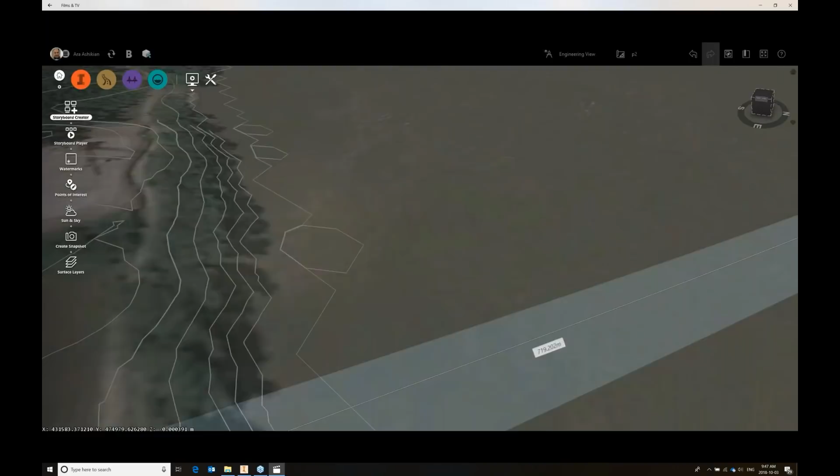Here we're going to place it on the other side as well, and we'll also flex some of its dimensions. Maybe make this portal a bit shorter than the other one and have fewer overhead struts where it daylights.

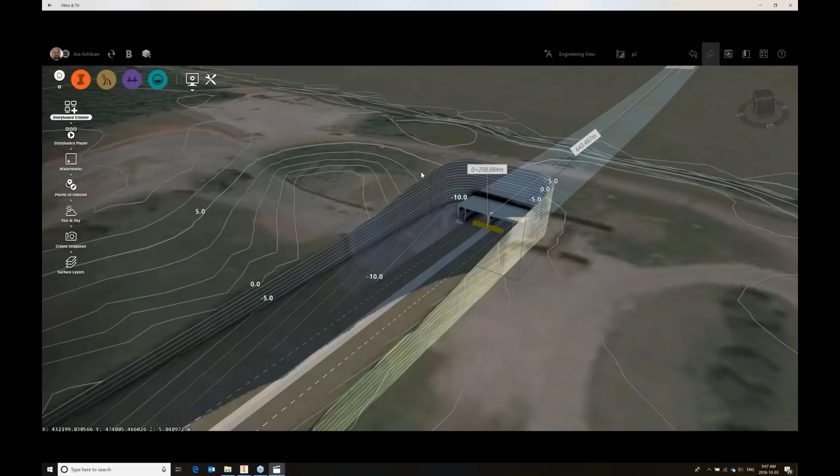Again, completely open-ended. In the complex tunnel, you might even have interior sections with segmental design and so on, precast panels. All of that is possible.

We're going to be refining the generic objects so they become slightly more formal for tunnels and for precast segmental, so that they automatically understand variations of the superstructure, super elevation, and so on. These are the initial steps of allowing a much wider range of modeling.

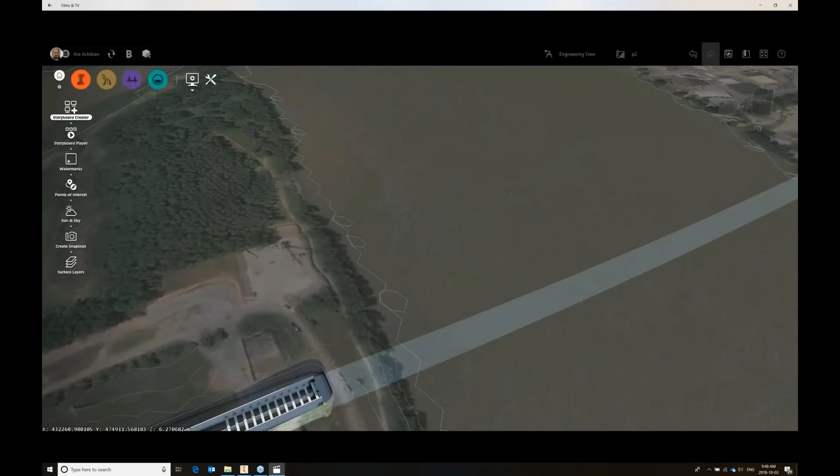Same easy workflow, same ability to extract information out of the system and integrate with Civil 3D and Revit. So that's the overview that I have for today. I hope it sheds some light as to what you can do yourselves and the exciting direction that we're taking, where we want to go in the upcoming releases. And Ben, I turn it back to you.

Great, thanks, I appreciate it. So it looks like Austin and Elliot have been helping out with a number of the questions that have come in, but I know a couple of the questions we had previously were circling around Inventor. Do we know if there are any plans to include Inventor with the AEC collection?

Yeah, that's a very common question we get. At the moment, no. It's because Inventor is the heart of the manufacturing collection, their kind of marquee product there. We use it in this workflow because of its very strong modeling capabilities. You can model much more complex geometry, and as you can see in the bridges and tunnels, we can leverage all sorts of aspects of Inventor that are frankly more suitable than modeling directly in Revit.

But I should re-emphasize that for most cases, most users in InfraWorks, even those designing bridges and tunnels, are going to be using the system, and they'll have a few colleagues that might create content. So because of that, but also mainly because Inventor is the heart of the manufacturing collection along with Fusion 360, at the moment it's a separate edition that you have to bring in if you want to customize your bridge and tunnel, or terrain generic objects.

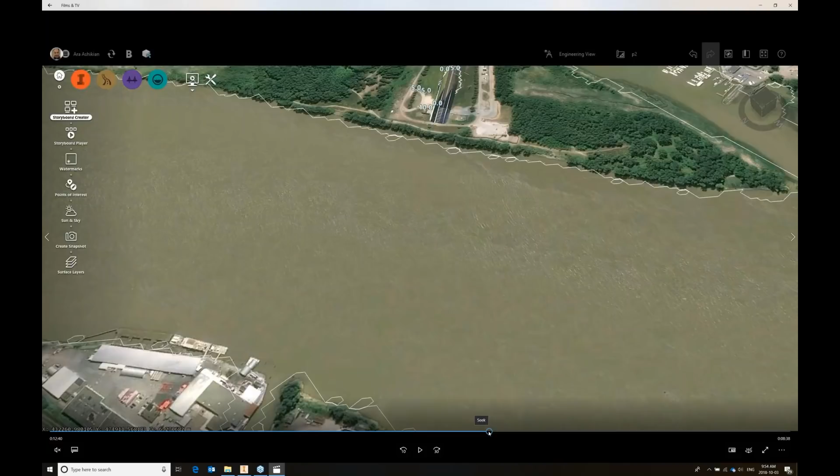I think it's a combination of both. A lot of the things you showed today, correct? Yeah, so a lot of this...

We kind of custom built to create these models for this video. We haven't necessarily exposed all of these. We will aim in time to put more in the library, but some of these, when you create - if you look at the components we ship with the product, they tend to be... if you look at the pier for instance, you can do all sorts of different variations of the pier.

So we have to spend a bit more time to make it robust and universal enough. Some of what I show in this video, we just modeled enough to show the intent, so they're not necessarily ready for widespread use yet. But in time we plan to augment our libraries a bit. The key message is all our clients leverage these capabilities, create your libraries, and use it as a way to differentiate - create your components, and even save your bridges in the libraries and reuse those. There are more benefits coming with even tighter integration to Revit. This is the preferred approach.